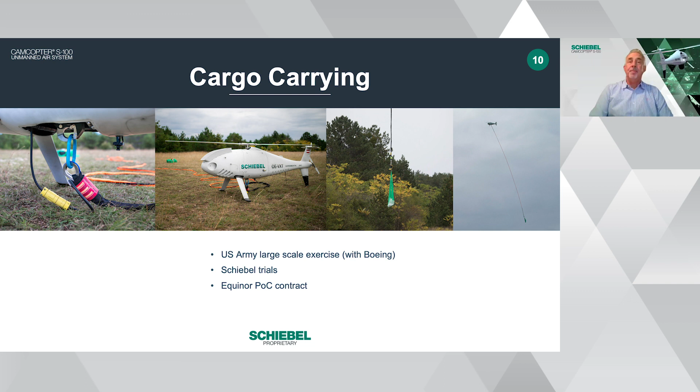One of our most important customers in Europe is the French Navy. We've had a relationship with the French Navy and the DGA for over 10 years now. We're very proud to say that the S100 is fully integrated into the Dixmude helicopter carrier in France. As evidence of the confidence the French Navy has in our capability, they recently took delivery of 4 additional air vehicles in November, just last month.

EMSA stands for the European Maritime Safety Agency. Schiebel has won a number of contracts with this organization, with 2 main areas of operation: maritime surveillance and what we call sulfur sniffing. On the maritime surveillance side, we fly with an MX-10 in the main belly of the aircraft, and we add what we call an Oceanwatch, a long-range camera, giving a dual payload capability where we're able to fly out to long ranges and do basically ISR - intelligence, surveillance and reconnaissance - in the maritime domain.

We've already completed a successful land-based operation in Croatia, and there's been a second one in Finland, which has been a mixture of land and ship-based, with a number of other deployments coming in 2021.

On the right-hand side is what we describe as the sulfur sniffing. As of the 1st of January this year, the IMO, the International Maritime Organization, put legal limits on the amount of sulfur that ships are allowed to emit from their funnels as they go around the world. As you might imagine, a number of those might not meet the limits, and EMSA is very keen to understand what ships are coming through European waters that are either inside or outside of these new regulations.

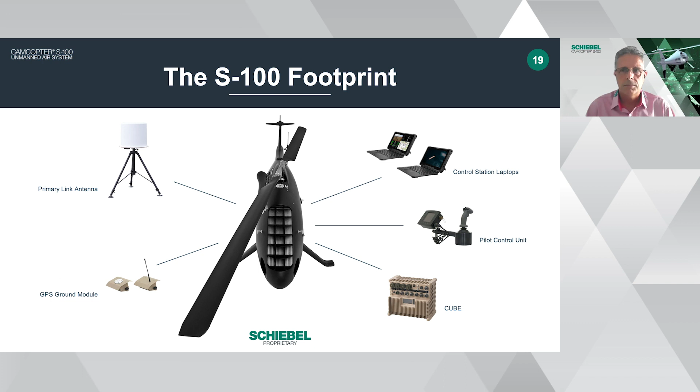Talking about the technical specifications, our maximum takeoff weight is 200 kgs. If we look at our empty weight of 110, we therefore have 90 kgs to use for payload, whether cargo or fuel. Our 57 liters in the air vehicle is very important, as that gives us 6 hours endurance under most circumstances. One of the interesting things to note is the payload electrical power available of 1,000 watts.

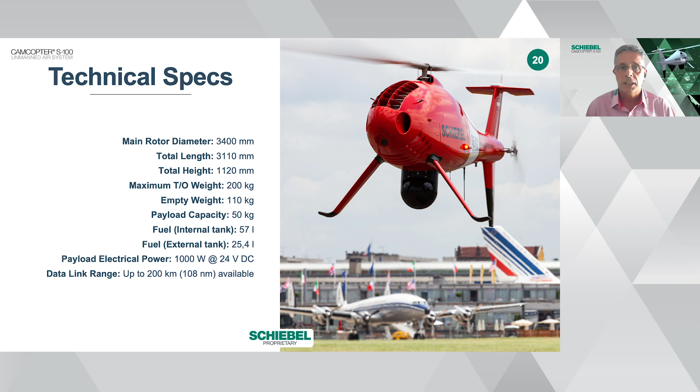A lot of the sensors used in this environment are very power hungry, so having the ability to deliver 1,000 watts means we can integrate a wide range of sensors and therefore have diversity and multi-role activity. Finally, with data link ranges, we have the ability to have a data link that goes out as far as 108 nautical miles or 200 kilometers. We also have smaller data links in range that can reduce that down depending on the customer's requirements.

Some performance specifications: we have a velocity never to exceed of up to 130 knots, and a dash speed, or transit speed to an area, of 120. Some configurations will mean we may reduce that artificially, but this is what the machine is capable of. The loiter speed, or minimum power speed used in most helicopter operations, is around 55 knots. By slowing down to this speed, we get the best use of the fuel available, and this is where our endurance comes from.

It can also slow down to a hover if necessary. In terms of versatility, not only can it move out to a target at a fairly respectable speed, but once there it can loiter in that area, spin on the spot, look, hover, move at 30 knots, 40 knots, whatever is required for the particular mission. We can also extend our range by putting on an extra fuel tank, giving us up to 10 hours of endurance, but with all the extra fuel there is reduced payload.

The service ceiling is 18,000 feet as tested, but most of our operations are restricted to around 12,000 feet, and we find we can still see everything we need to. Really interesting is the operating temperature range: we can go from the very cold of the Arctic to the hottest places of the desert if required, which makes us very versatile in where we can operate throughout the world. Also, wind limits for takeoff are currently 25 knots, and once airborne this increases to 35 knots, so again a very good spread of ability to make the most of it.

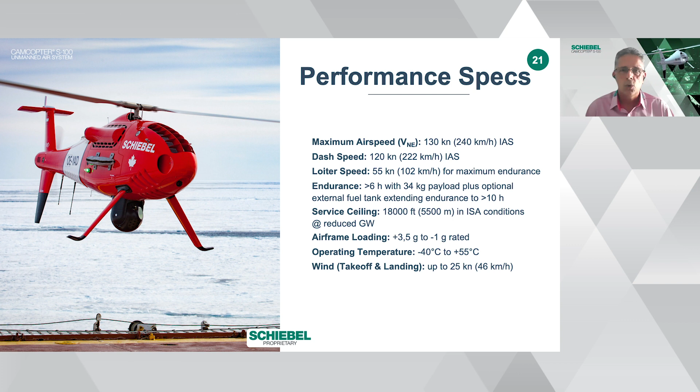One of the important questions people ask us about is the difference between the engines, the avgas engine and now the heavy fuel engine. Now we have a short presentation about the heavy fuel engine.

Hello, my name is Thomas Lutzer, and I'm a senior development engineer at Schiebel, working in the engine development department. Schiebel made a huge step in the past to decide to develop and produce its own rotary engines, which makes us very flexible and independent. We use rotary engines in our Camcopter S100 because of the major advantage of very low vibration and a huge power output combined with a small size and small weight. Over the last years we gained a lot of experience to make our engines even more reliable, using the most modern manufacturing technologies to achieve a higher time between overhaul and a continuous weight reduction.

This is our gasoline engine, the S1, but currently we are focused on our brand new development, the S2 heavy fuel engine. The S2 engine was designed from scratch to fit into our existing Camcopter and to run on various kerosene types, which is very important for us, especially for maritime operations. The S2 engine is the first heavy fuel engine worldwide in that power-to-weight ratio class, and can operate from a temperature range of minus 40 degrees to plus 60 degrees. Because we achieved a very low fuel consumption, it can fly more than 6 hours, and that's great.

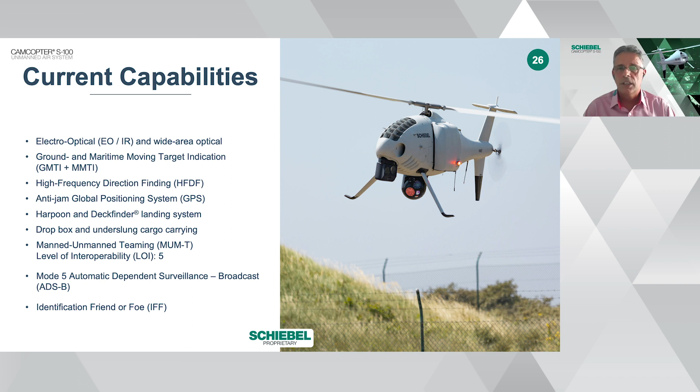We've used drop boxes on the side payload bay, as we can see in the slide here, and now underslung load operations. We've done manned and unmanned teaming successfully. We can have mode 5 automatic dependent surveillance broadcast, ADSB, so the ability to interact with other civilian flights and flight areas, and of course the IFF identifying for military scenarios. So a very capable and wide-ranging use of the S100 will fit both nicely into civilian and service environments.

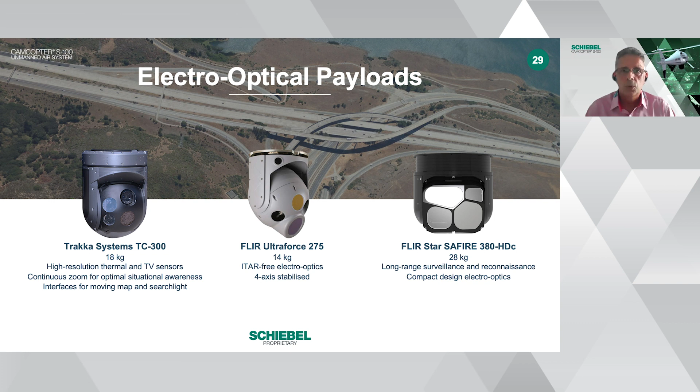Also another three options here with various payload weights, and again they are all offering good quality EOIR. This is really down to the customer as to what their preference would be for a particular EOIR sensor, but there are plenty of options available. If there was another EOIR somebody wanted to use, all you have to do is ask us and we can look at how we can integrate that into the system. We're very well schooled in integrating various sensor options.

So we talk about EOIR detection ranges, in other words, detect, recognize, and identify. The NATO standard is a target of 2.3 by 2.3 meters. If we look at detection ranges, up to 28 kilometers, 15 miles, be able to recognize at 18 kilometers, and then typically identify at 11 kilometers. At night, the one that's not widely spoken about is the identify, but even those ranges at night are very, very good. What does that look like in reality?

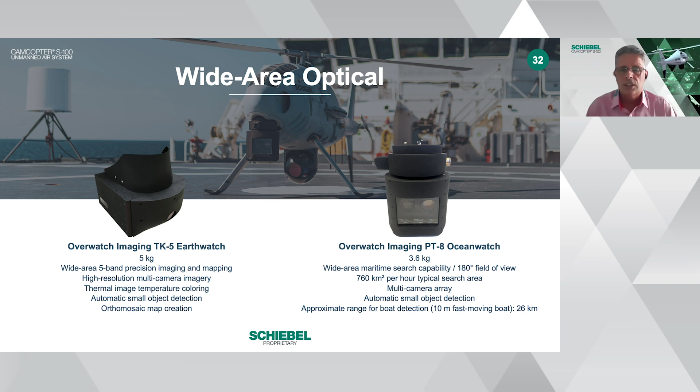This, for me, is the real exciting part of where this technology has gone using artificial intelligence. Overwatch recently, in the last few weeks, announced their night watch capability. Having spoken to them, detection ranges in the dark are currently around 22 kilometers. If you then take this as a day-night capability, unfortunately you will have to switch out the sensor. But if you are operating at night out over the ocean, the ability to detect something with this system is, I think, a game changer when it comes to search and rescue and detection for vessels in the ocean.

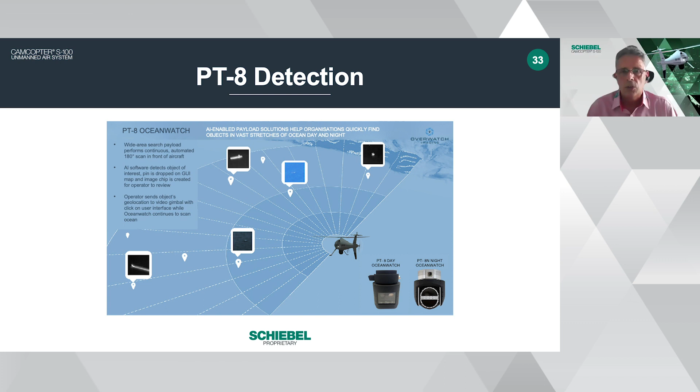The other big requirement currently is for synthetic aperture radars, able to detect and classify targets in all weather conditions. Currently, we have two options available. The detection range is typically between 15 and 30 kilometers.

One would be side-mounted on the side of the UAV or the S100. Some will argue that the 28 kgs is greater than the payload we say on the side, but we obviously counterbalance this when we install it.

The other one is an under-mounted radar that can do both ground targets and maritime target indication at the same time. Because of the weight of these sensors, it's very easy to have a reasonable quality EOIR camera in the nose of our S100, so you can use radar and EOIR concurrently if you wanted to.

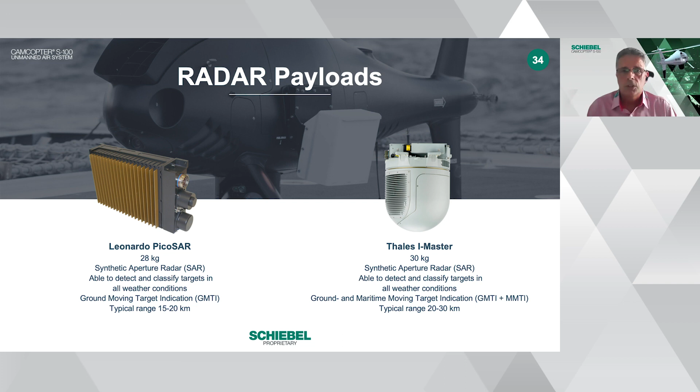So we really are talking about flexibility. We had a requirement to mount an I-Master radar underneath the S100. Obviously, we also want to be able to land on a ship and have an EOIR capability. Here we have a picture of that very configuration.

You will notice that the S100 does look like its legs have grown somewhat, and that is by design. We had to extend the undercarriage of the S100 to make it land safely in a maritime environment, and you'll also see we've got a special tail extension.

So flexibility is the key. You can have a maritime radar and an EOIR, have 6 hours endurance, and be able to hover and spot-look if you wanted to. We believe that is extremely flexible.

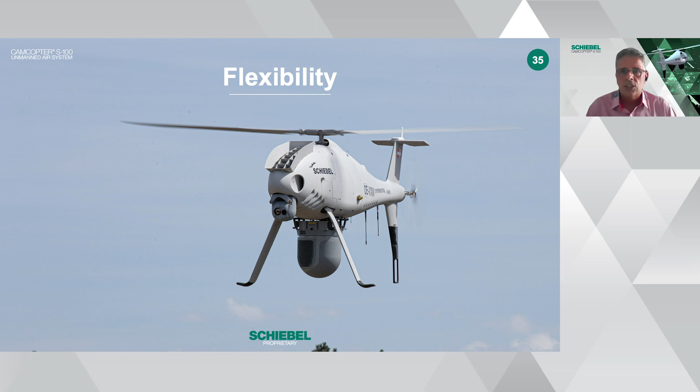And then finally, some additional payloads. We obviously have the ability to have AIS to look at ships and get ships data, which is very popular in the maritime environment, and a lot of our customers would specify this.

Also, with the transponders now, the lightweight ADS-B is giving much more assurance to authorities to allow interaction with civilian airways. And then finally, we can fix antennas to do DF finding.

So again, what we need to know from you as a customer or potential customer is what do you want it to do? If you say you want it to fly for 12 hours, well, we would have to try and figure a way to make it fly for 12 hours.

But if you're looking for a capability that is truly multi-role, where you can have an EOIR and drop a cargo load at the same time without having to re-role the aircraft, then we have that option for you today. All we need to know is what configuration you would want. Thank you very much, and I'd like to pass you on to my colleague now, Michael.

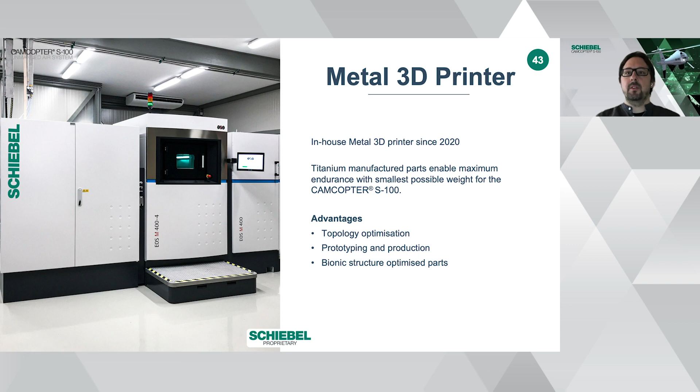Hello and welcome to our high-tech additive manufacturing center here at Schiebel in Wiener Neustadt. My name is Dominic Kohl, and together with my team we are responsible for producing our 3D printed titanium parts. We opened this facility at the beginning of this very special year and are very proud to announce that we are already in serial production with our first components. The innovative 3D printing technology allows us, for example, to produce these landing gear brackets with less than half of their original weight, but simultaneously much stronger. By the use of bionic structure optimization, we are able to further enhance the product of our Camcopter S100. At the moment, we are developing several different components in order to offer the benefits of our brand new high-tech facility to our customers. Stay tuned and see what comes up next.

Hi, my name is Bernd Sikornik. I'm head of flight operations and training. Next to flight operations, I'm mainly responsible for the trainings, customer trainings and internal trainings for pilots and technicians. Currently, we have more than 30 trainees in-house training on our system. We continue business as usual, but of course, due to the pandemic, we put strict safety measures in place, like the general reduction of trainees per classroom, our mandatory mask requirement, and on demand we are even able to conduct quick tests with antigen tests. In general, I would say our business continues to grow. Our customers are happy to be here, to be trained even in difficult times, and I am looking forward to next year to complete our trainings on demand.

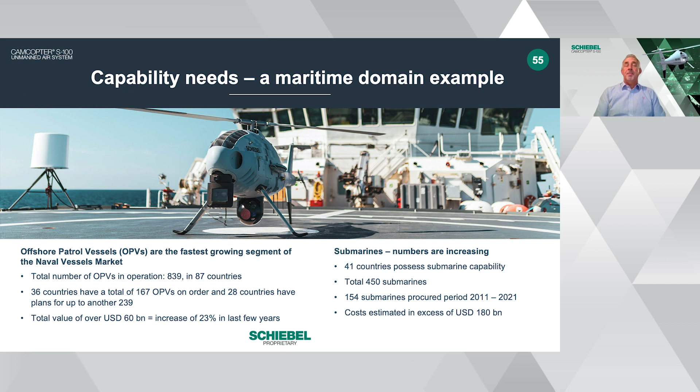So this is just one slide that gives you an idea of the future capabilities we're looking at. To pick up on David Peel's slides, we very much see the S100 as a multi-role, multi-domain capability.

If we start with anti-submarine warfare, we've started work with 2 or 3 large primes looking at how we can adapt the S100 to deliver an ASW capability. There are 2 ways to do it: we can fit side payloads and drop sonar buoys, or replace the main sensor in the belly and add a cable with an active sonar on the bottom, which is detachable and expendable. So even though the S100 is still quite small, with a payload capacity of 50 kilograms, it can deliver an ASW capability today.

Moving to the right-hand side, you see the words magnetic anomaly detector. This has already been trialed in the United States on an S100, and will give an enhanced capability in this area.

Moving to the second picture, LiDAR, light detection and ranging, is often a requirement, whether over land or over the sea, particularly in shallow water areas. We've recently won a contract in the United States to see how we can deliver an effective LiDAR capability on the S100, which is a very exciting development.

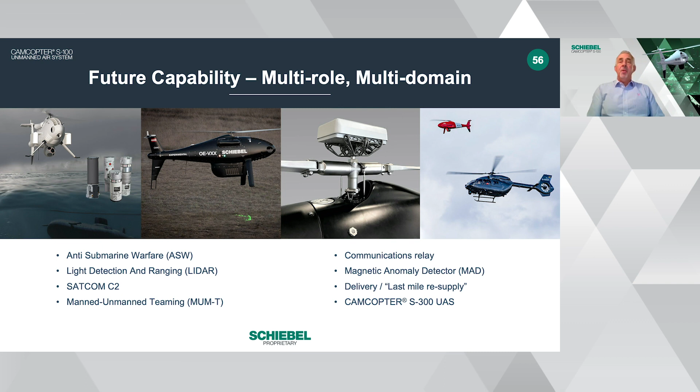So where do we stand today? We very much look into the future as a company. Our primary aim and focus is the S100, and about 80% of all our focus goes into the S100. But we also recognize there is a future requirement for a larger helicopter UAV - we call this the S300. Figures are yet to be finalized, but we estimate it will come in at about 600 to 700 kilograms maximum all-up weight, giving a maximum payload capacity of around 250 kilograms.

And then as always, once you play with the payload and the fuel, we can probably get up to somewhere in the 20 hours worth of endurance with a light payload, or down at low endurance with a large payload. So again, we're very much looking at a flexible system of the future.

So where have we got with the S300 so far? Well, as you can see from these pictures, we have a rotor head, we have a gearbox, and we have the gearings in place. So the transmission is now all connected up and ready to be tested.

And the next steps are to perform a transmission performance test and, as you would expect, loads and vibration assessment. Slightly longer term, we'll start to look at reliability modeling, and further out, more important aspects such as ILS, integrated logistics support, and the maintenance requirements.

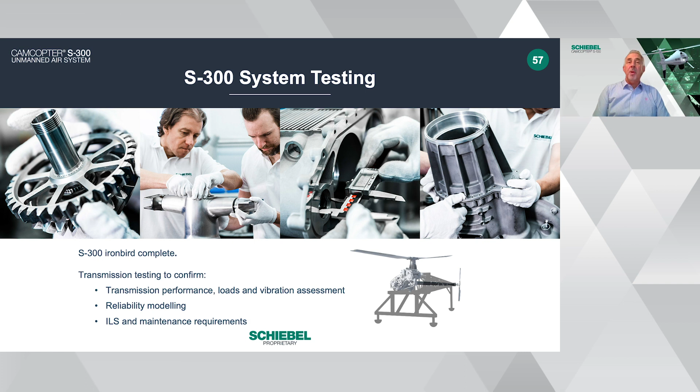I'll now move on to the company side of things, moving away from capability and sensors. The first statement here is our mission statement, and I wondered whether I should put this up or not, but actually I think it really shows everybody out there in the market the intent of the Schiebel Group, where we are today and where we want to be in the future.

We very much see ourselves as creating a certifiable system that continues to maintain its technological advantage, but also looking to partner, as we do already, with the best technology providers and partners that are needed out there today. We very much need strong partners to achieve our ultimate aims.

The first bullet point talks about the size of the VTOL UAS market. Now, we all read lots of reports, we all have different views on this - here's just a couple that I've found. One report suggests 498 million US dollars has been spent on the VTOL market up to 2019, and this will rise to 3.6 billion US dollars by 2030, which gives us a growth rate of close to 20%.

I read another report that suggests actually by 2030 we could be up at 9.8 billion US dollars. Now, of course, none of us here know the truth, how realistic or true this is, but I think what we do all recognize is the market is most definitely growing, and it definitely has quite a steep growth path.

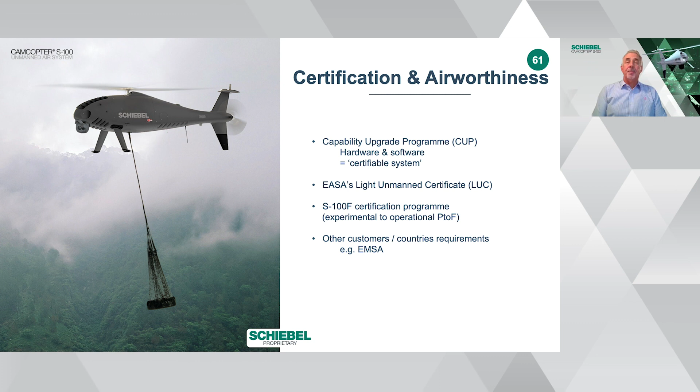That's me. Thank you very much.